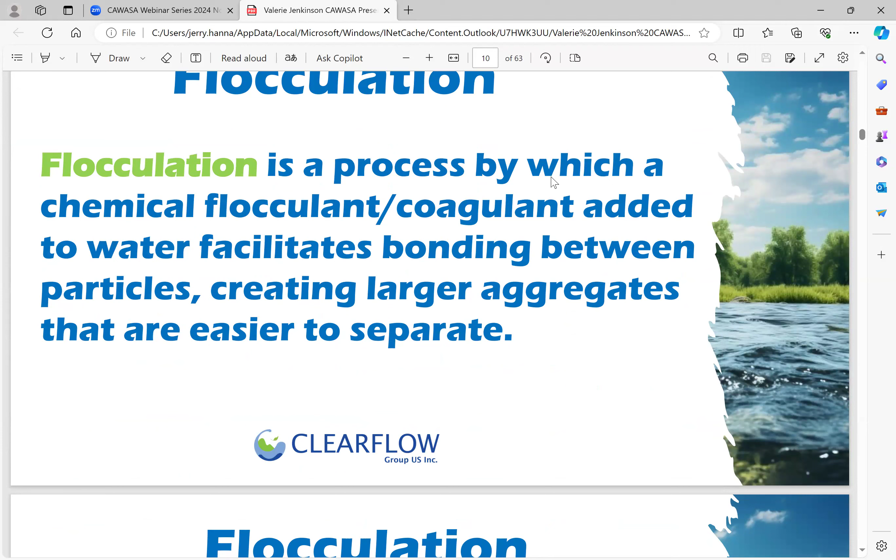Flocculation, of course, is a common process where a chemical flocculant, coagulant added to water facilitates bonding between particles and creates larger aggregates that are easier to separate. Our goal initially wasn't to cause the separation, but to cause the particle to be large enough to capture. The beauty of it was we did it so well, we were able to really clean the water down at the quantum level.

So we're below 1 micron in particle sizes that we're dealing with. We're down in many cases to dissolved particle size, dissolved colloidal particles, etc. So we're now getting into some very unique strata in water treatment.

Jar test demo - I'm not going to do that here today, I don't have the stuff. That was what Hank was going to do as part of this. But basically, it's a very simple process, 10 to 45 seconds. You mix it around and the deposition starts virtually immediately. We're looking at a ratio that we can now coordinate the time factor and optimize the usage.

Industries we serve, of course, include mining, construction, agriculture, water treatment, stormwater, and hospitality environments.

The other thing to consider is that we can act as a pre-treat, a solo treat, or a post-treat, depending on the application. That's a rather unique position to be in, because if we're going in as a pre-treat, we can augment something that's already there. We can use existing processes and infrastructure. If we go in as a solo treatment, we can utilize existing infrastructure wherever possible, really minimizing costs, with a very simple application to add into the process.

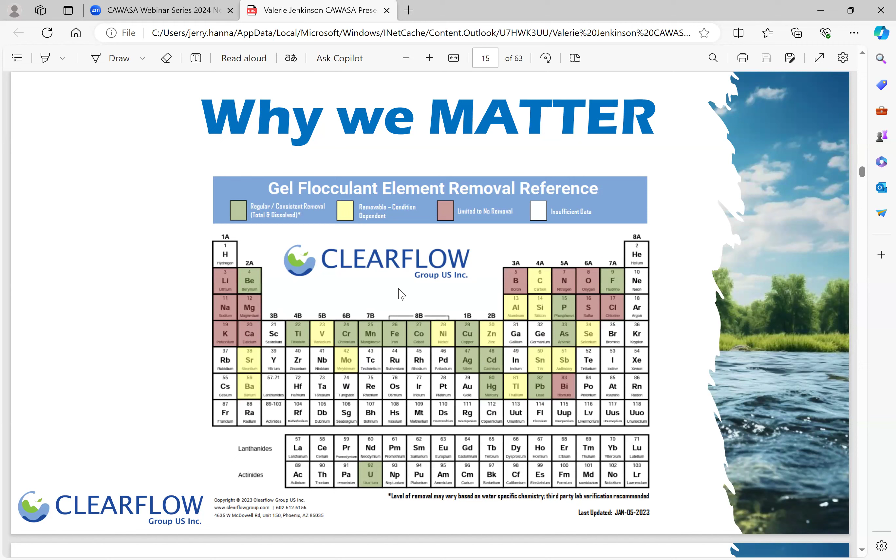But we keep adding more and more to this process as our clients come to us and ask, can you take this out? Recently we had fluorides - can you take out fluorides? The answer was yes, we can, up to 96%. Can you take out phosphorus, dissolved and total? Yes, we can. Because we're the manufacturer and inventor of the products, we typically invent one or two new formulations per year to answer these other water streams and waste streams we're dealing with. A very unique capability, unlike standard flocculation.

Everybody understands the result of a flocculant or a coagulant and what it does, but our chemistry goes far beyond the standard chemistry that's available. We're not just creating a thickened process, then combining it, and then having it fall out. We have a very good process here where we're actually taking care of it without having to worry about things like pH.

In most flocculation processes, pH is a critical part, and they are really limited by the pH in the water. If it's a pH of 3, it's very difficult to treat - they may have to do some crazy balancing to get it, or at a 4 or 5. Or when they're up around 10 or 11, they can't get it out either. So one variation in pH can cause a problem with standard technology. Our technology allows us to work within a range of 3 to 12 without having any variability whatsoever in the efficacy of the product. That's really a unique scenario to be in.

Because we started this in mining, we were dealing a lot with mining and oil sands, et cetera, in Alberta, and we had to deal with temperature variances. For mountain mines, we had a lot of issues with freezing temperatures, and we do a lot of cleaning of water in frozen lake beds, treating the water that's below the ice.

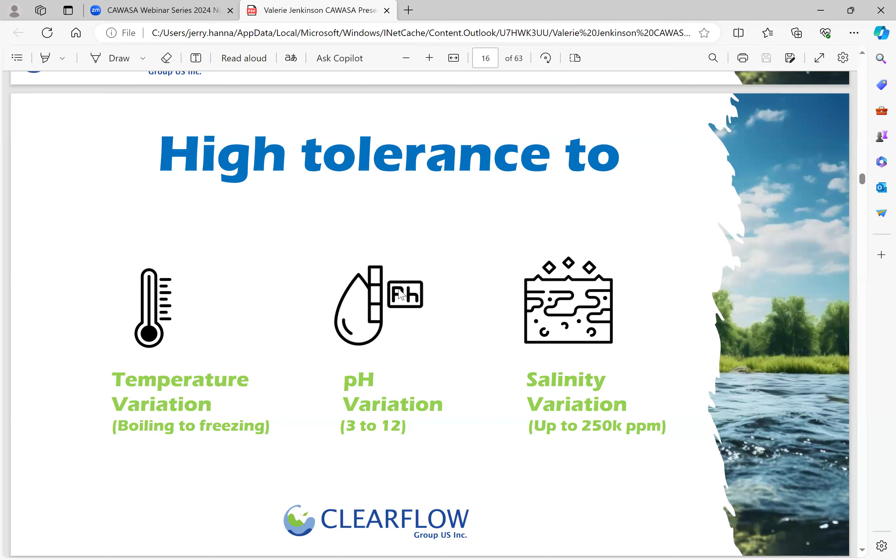We've been over 100,000, one case even up to 250,000 milligrams per liter, parts per million. That's not typical, but we have done it. For the most part, though, freshwater to seawater is a very easy range.

Operational resilience: this material is self-dosing. It does not require dosing pumps. It's a gel flocculant. Now that Hank's on board, I'm hoping he'll do a little demonstration after this to show how the jar test works. We don't require costly sensors, it's self-limiting, we don't need metering, and we're not having a lag time.

As I mentioned earlier, we're dealing with particle size, not necessarily getting to a particular volume in the water. That gives us a unique process for pulling out particles, because they're gathered and bonded through release based on the load factor. So if you have 100 milligrams per liter of TSS versus 1,000 milligrams per liter, it releases the required amount to accommodate that load factor. If the TSS is like 1, it releases way less than it would at 100.

That gives us a unique property as well, and a long release time. The gel flocculant blocks, if in situ and placed in an open channel - we'll see some pictures in a moment - will last anywhere from 8 to 12 weeks, and in some cases as high as 15 to 18 weeks, but standard is about 8 to 12 weeks. In reactor systems, the pipe systems we've developed for mixing, they'll need replenishing every 2 to 4 weeks.

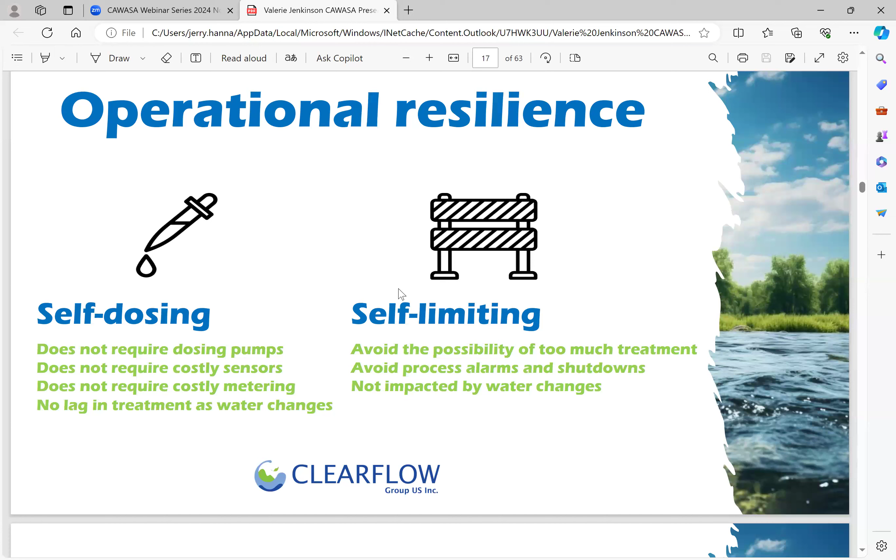Environmentally friendly, we've won numerous awards. In 2022, we won the Sustainable Earth Award. We won 2021's Clean Tech Award, an international competition where they chose 3 companies to be the winners - we were one of the 3. We're very proud of all the awards we've won over the years, probably too many to mention.

Our approach is to utilize site-specific samples and layouts of documents to understand the challenges with our clients. Then we come up with a solution based on our gel flocculant and our ClearFlow technology that will be optimum for the site. We do request water samples so we can determine a specific match of our formulations to the water chemistry and constituents in the water.

And now we get into the wastewater fun. Well, I've been dealing in wastewater since I was 6 years old and fell into a septic tank. I don't think life has ever stopped since then - I've always been around water of some type.

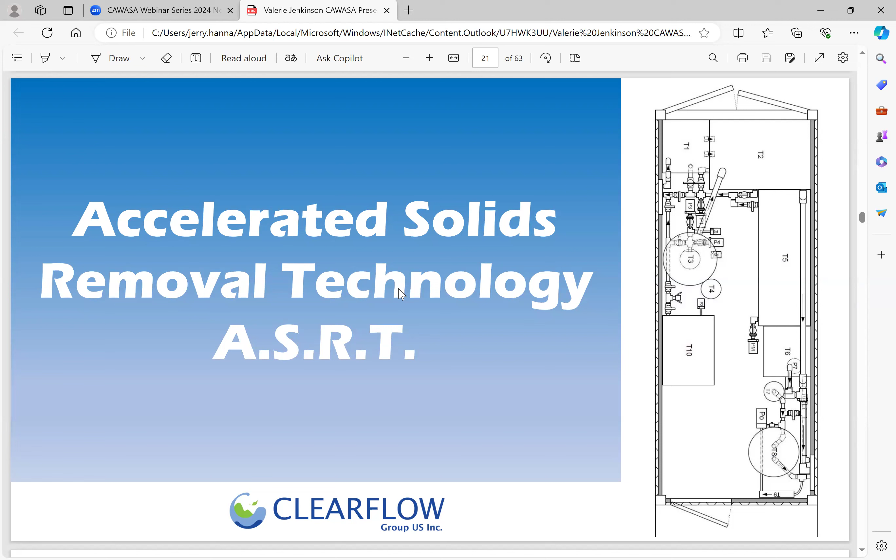We developed a system called Accelerated Solids Removal Technology, or ASRT. The one I'm going to show you here is for 23 cubic meters a day treatment. It's a batch process, but they're scalable, and we've scaled up to larger units. You can put them in series as well, and even do higher volumes. We have a number of them in India, going anywhere from 10 cubic meters per day up to hundreds of cubic meters per day. So it's just a matter of seeing what's there.

Our comparison: centralized wastewater treatment is becoming a big issue, mainly due to infrastructure and the cost of running it to low populated areas. They're large, expensive to build and operate, complex, and require lots of money, people, technology and training to operate. They also have a limited user base. Then you have localized wastewater collection, which goes to a sump system dumped off at a centralized plant - inexpensive, portable, but manually intensive. And then we get down to wastewater deposition areas.

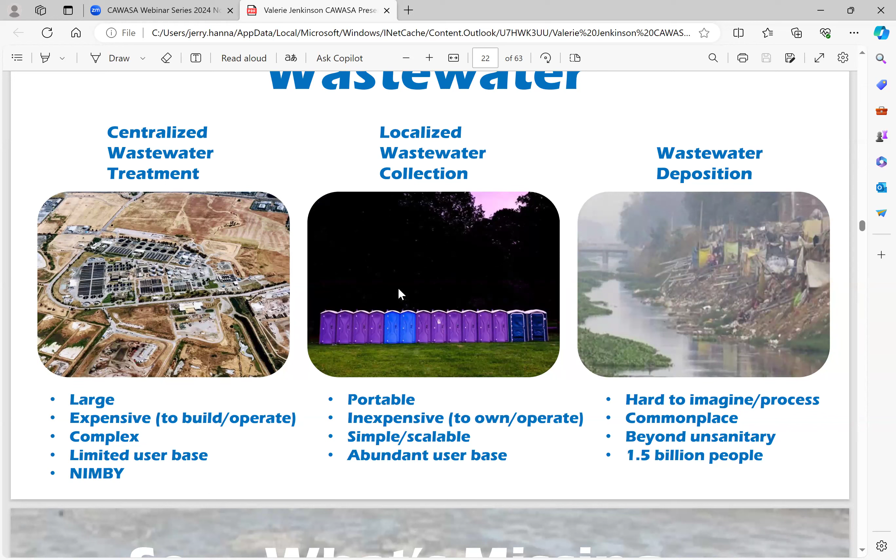This one particular picture is of a river that we worked on in India, where we were treating the wastewater going into it so that we could minimize the impacts. It's pretty scary stuff in some of the sites that I've been to all over the world.

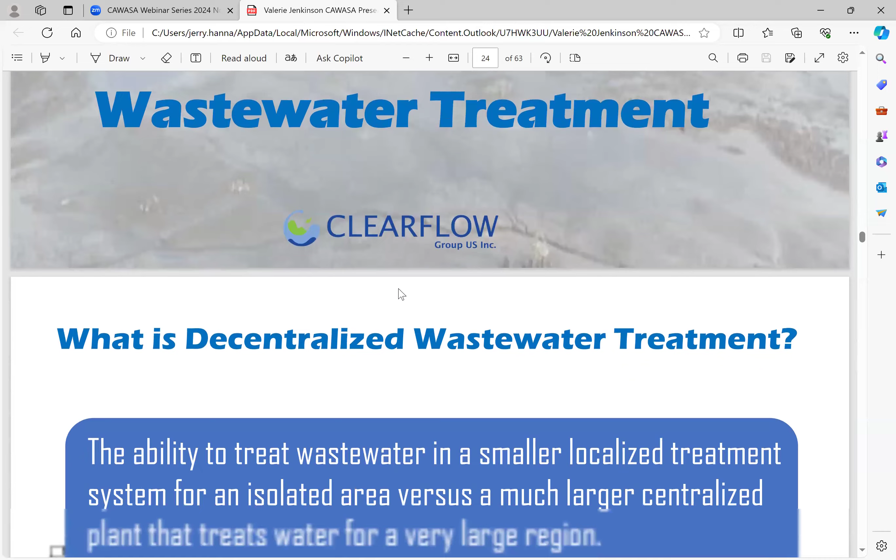What's missing is basically an innovative decentralized wastewater treatment process, which we feel that we've come up with. In my 47 years of dealing in wastewater, this is probably the most efficient system that I've seen. I hate to say that sometimes, because I really sound like I'm blowing my own horn, but it is a reality, and we've been told that by many, many people that use it.

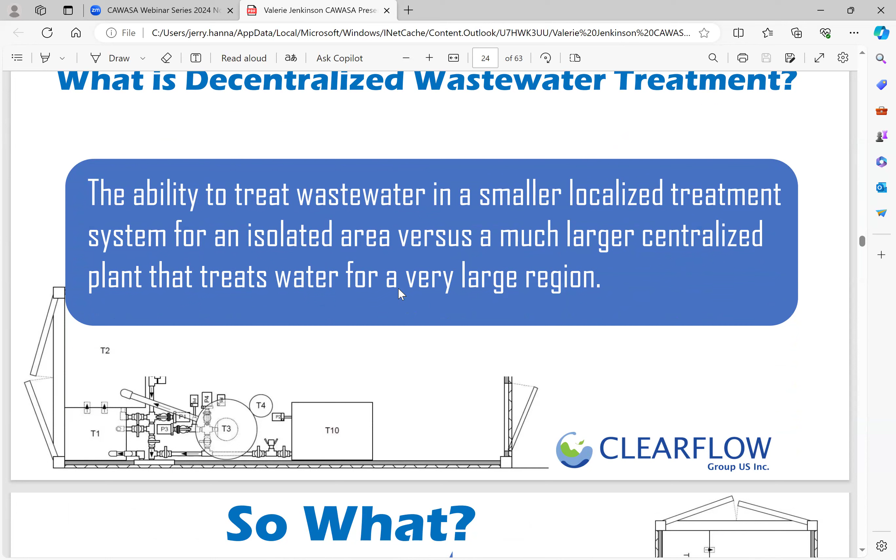From the perspective of operational, it's very simple. You do not need to have multiple engineers operate it, and it can very easily be moved, transported, portable, or made to a fixed system.

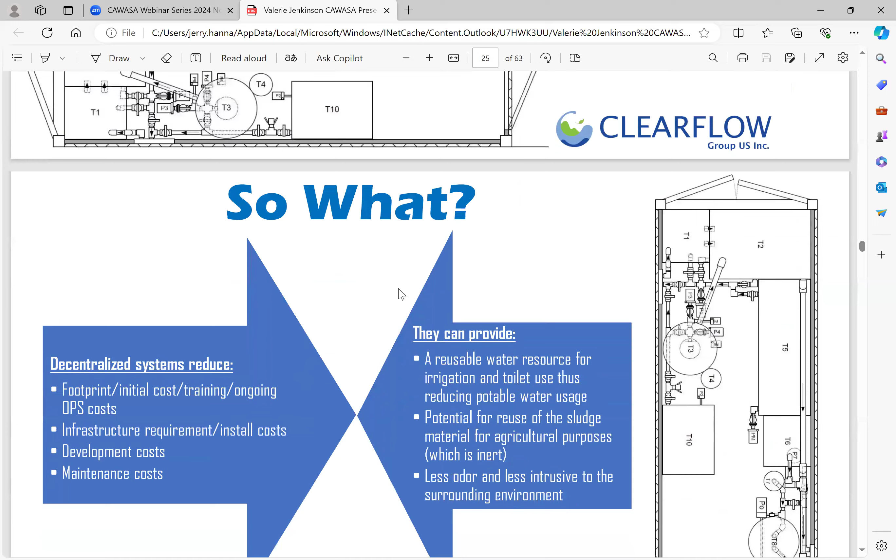So what we do with decentralized systems and our ASRT system is we're basically minimizing footprint, timing and process, initial costs, training, ongoing operational costs, infrastructure requirement, installation and development costs, and maintenance costs.

The core technology in the ASRT, again, is our gel flocculant, and it's very unique property when it actually deals with ozone, because we do have ozone that we've operated in this very low self-producing ozone system.

Typically, to get to an ORP value of about 780, you're looking at about a 20-minute process. When we add the gel flocculant within our system to this process, we're gaining a huge amount of time. In about 4.5 minutes, we're at the ORP value required. So really a huge difference in operational capability and results.

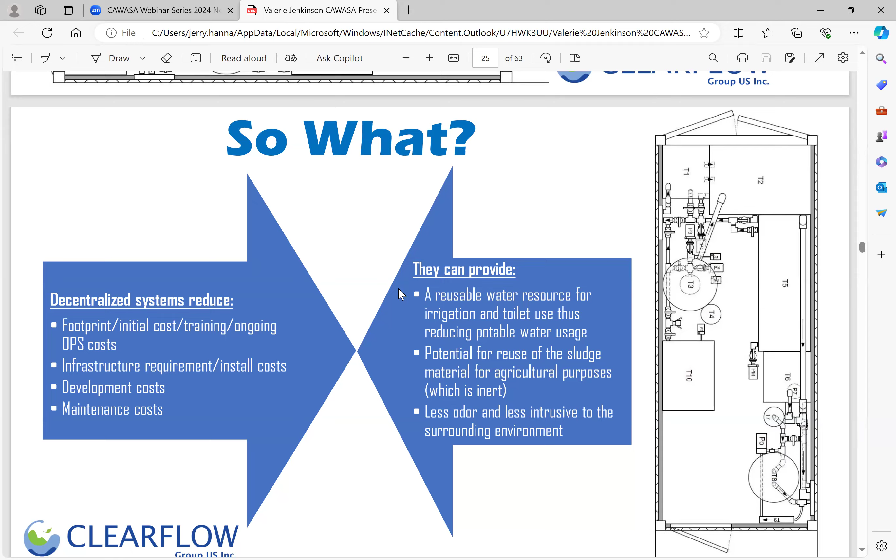So again, we're providing a reusable water source for irrigation and toilet use. We're providing potential for reuse of the sludge material. The sludge that's based in our system, once it's done, that sludge material is basically inert after 24 hours, so it can be reused. It's not going to have the bacterial issues that most sludge materials would have. Again, less odor, less intrusive to the surrounding environment as well.

So it's a physical mechanical process that ClearFlow has developed and patented. It allows for the removal of sediment within minutes, not hours, or days or weeks.

Typically, if you were to put this beside most even decentralized plants that we've dealt with, our operation is within 3 hours, you're seeing clean water. We like to say 24, because then everything has happened, even with the sludge. And it will do about 5 weeks worth of work in that short time period. So it's a huge competitive advantage to have this process.

We constantly are working with the National Research Council of Canada and University of Alberta. I represent as an ambassador for them as well. We're very heavily involved with doing continual research, and I lecture at the university as well, probably about, oh gosh, at least once a month I'm in there helping students and PhDs finish off their graduate studies, etc.

It's very good where we're looking at all of the constituents within the water, TSS, TDS, BOD, removing it from the water down to the levels that need to be hit, and for reuse as well. So we're really looking at that, having an advantage of very clean water for repurposing.

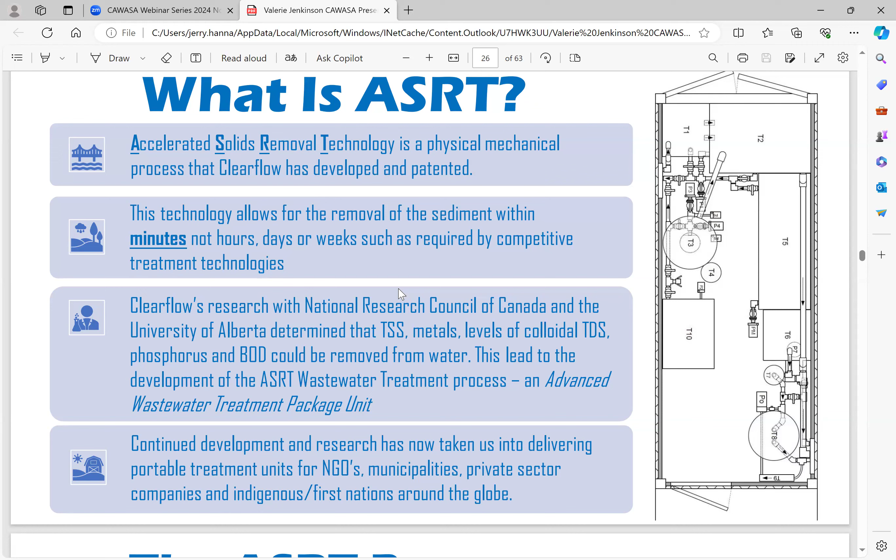In much of the wastewater streams that we're dealing with in some of these countries, they do a lot of mining or are in close proximity to all their waste streams. We're having to take out some very nasty metals as well. So this process does it all in one. You're not having to add a secondary process.

It's fully modular. It's portable. It can be trailered. It's enclosed for safety and security. It's plug and play. We've made everything so it's field ready and field maintenance capable.

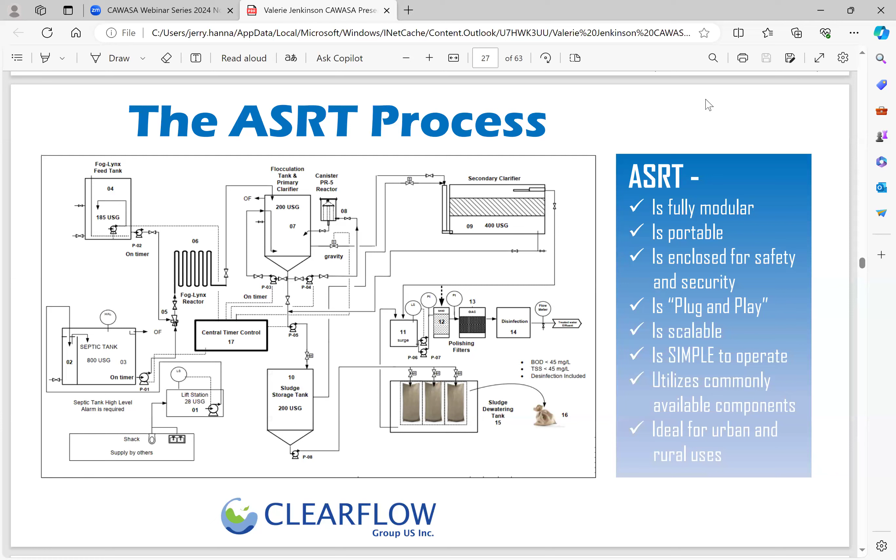So it's a matter of just changing out a pump. You just unplug one pump, put the pump back in. We've made it very, very simple for the operational piece. We're all about the operations and making sure that it works for those in the field. It's scalable, it's simple to operate, utilizes commonly available components, localized, and ideal for urban and rural uses.

So stage one in the process for the ASRT is multiple source influent water consolidation, loading surge tanks for volume control, utilizing macerator pumps to achieve particle size uniformity, and also looking at going into stage two.

We have the influent water treated with gel flocculant and what we call FOG lynx, which is a way that we're actually destroying the fat, oil, and greases and breaking them down, which most systems do not do. They get a buildup of fat, oil, and grease, and they cause a lot of clogging. Whereas ours actually breaks the fat, oil, and greases down and makes it simple to incorporate into the process and releasing of the water. Stage three, sludge is transferred into the sludge tank.

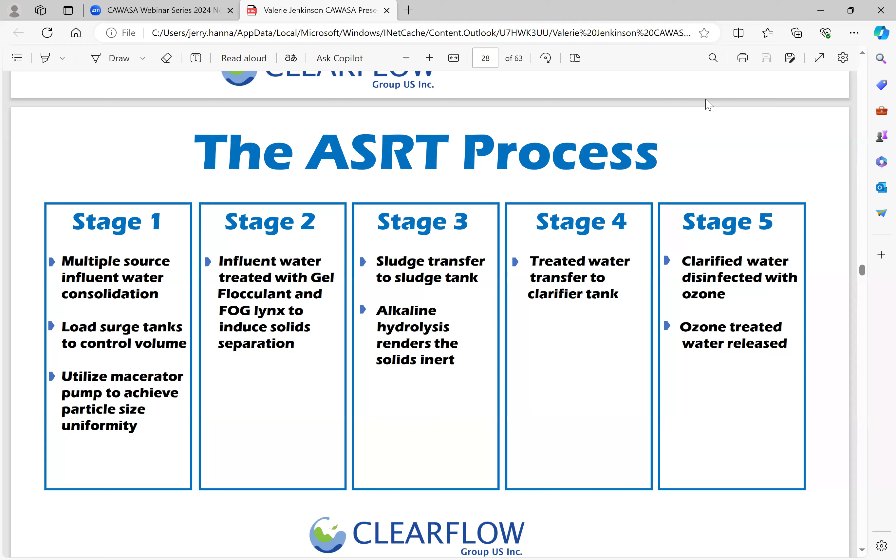And then we have a kind of an alkaline hydrolysis process that renders the solids inert, as I talked about earlier. Stage four is the treated water transferred to the clarifier tank, and then stage five, of course, clarified water is disinfected and can be treated and released.

So the process on a 150 gallon batch system is about a 20-minute batch cycle time. So real simple and easy.

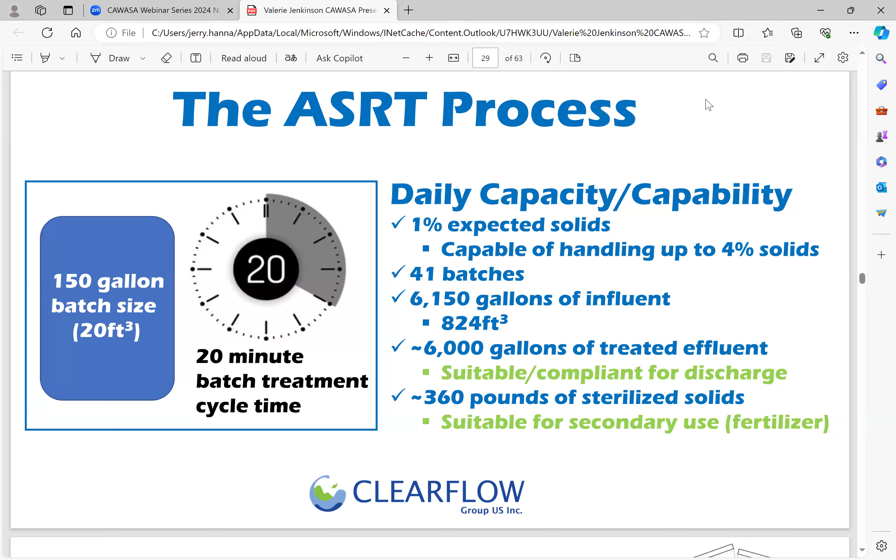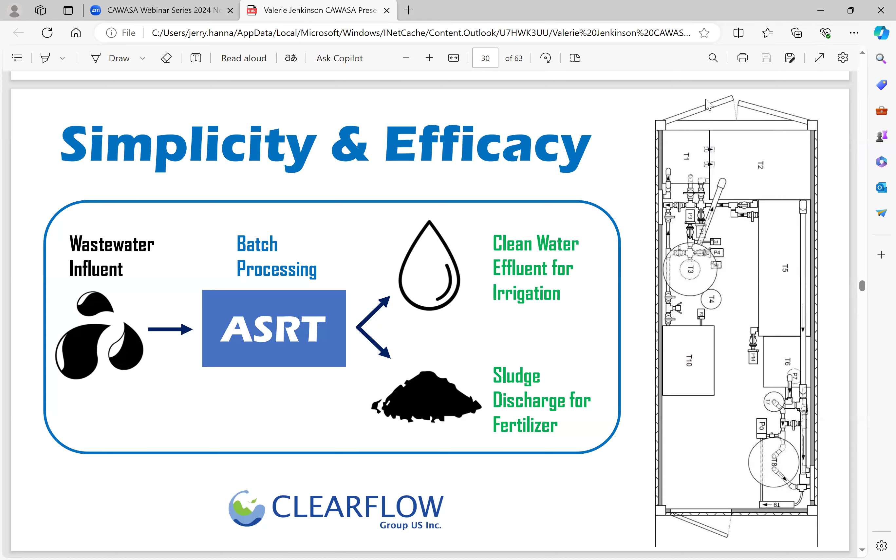Basically capability, 1% expected solids of solid ratio, capable of handling up to 4%, 41 batches or 6,150 gallons of influent, 6,000 gallons of treated effluent is suitable, compliant for discharge. And we have about 360 pounds of sterilized solids available for secondary use. So really a simplicity and efficiency process, really high efficacy, and giving a lot of result in reusable materials.

Results, this actually, if I look correctly, yes. So this is actually some results that we had done by a lab in India. And the reason that we put this here, if you look down near the bottom, they had a lot of metals. So they had iron, they had nickel, but they also had chromium, which was really, really a nasty factor.

And so we actually were able to take all of those metals out and bring them down to non-detect. We also took the TSS down to virtually a non-detect factor. The pH, we just had to do a slight balance on the pH. And then the total dissolved solids, of course, reduced dramatically by about 8 times.

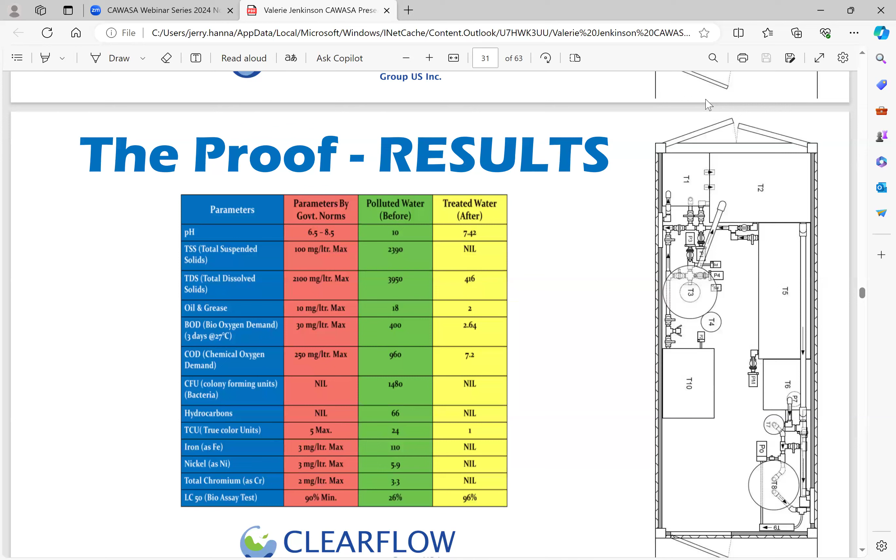This particular unit, as I said, that when we were talking about, was the 23 cubic meter per day system, and really simple 20-foot C-can or containerized model. Setup time's about 8 hours and getting everything operational with the lift stations. Technical support is available.

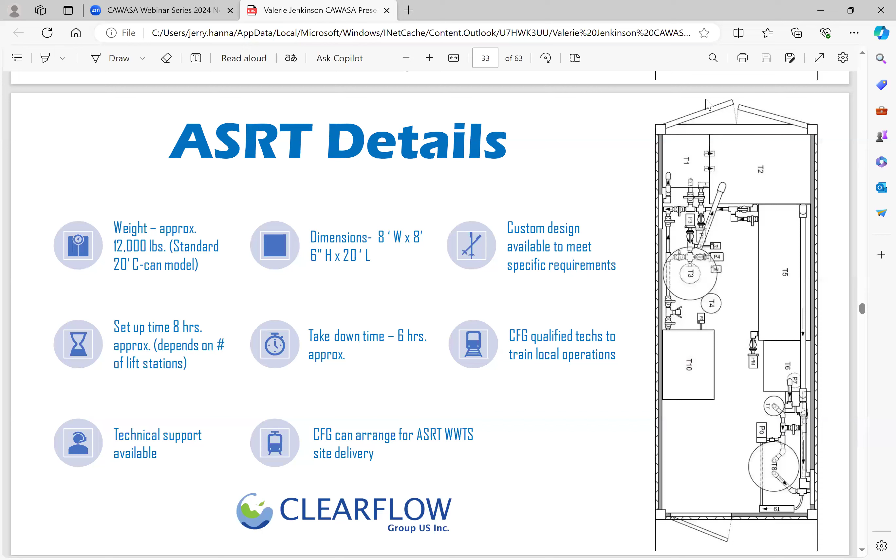Dimensions, say 8 feet by 8 feet by 20 feet long. Takedown time 6 hours approximately. We can arrange for site deliveries, etc., and it can be available to meet specific requirements. If you have some industrial waters that you have to deal with, we'll run some extra testing in our labs and make sure that we get the right formulation for that particular application.

So again, going into the repurposing and water restoration, we talk about different flocculant types that are currently available and have been available for many years through granular and liquids, and then now, of course, our addition of our gel flocculant.

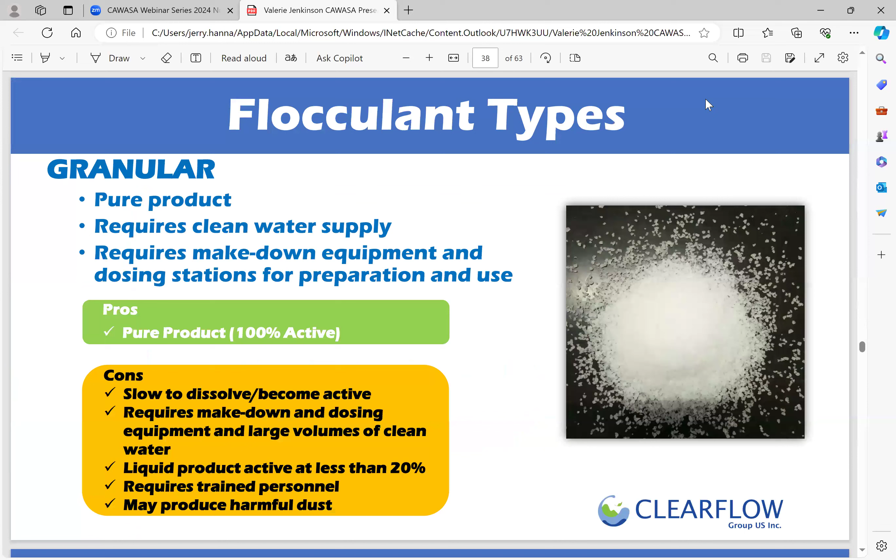Granular is a pure product. It requires clean water supply, make down equipment, dosing stations, highly trained personnel, and a very high ratio of monitoring to ensure that you've got no negative effects on the environment.

It's 100% active. You've got cationic and anionic, depending on which the application is that we'd be using. In many cases, we see anionics being used less than cationics, although that's starting to change a little bit.

The cationics have very, very negative effects on aquatic life. They're slow to dissolve to become active. Typically, you're looking at a 90 to 120 minute make down to convert it into a liquid before you dose it. Most people do not wait that long and end up dosing out live product. And in those cases, we typically have a lot of animal kills or fish kills.

Requires make down and dosing equipment, large volumes of clean water to make it down, because typically you're running at about 0.5% to 2%. No more than a 20% mixture, but typically 0.5% to 2% is your operational ratio. So you're looking at well over 90% is water.

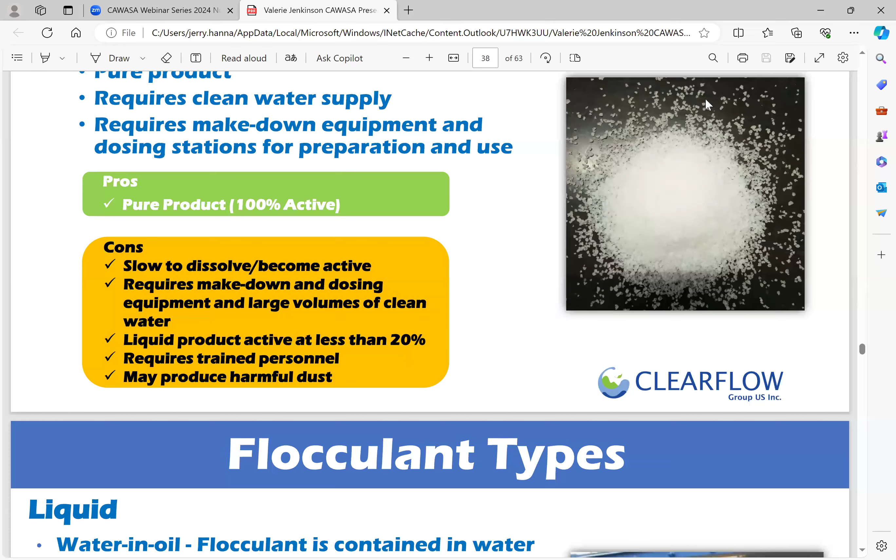So the liquid product is active less than 20%, as I just mentioned, and requires a lot of people to operate, and can be having inhalation issues for humans as well from the dust that comes off the granulars.

Liquid, again, there's two types. There's the emulsions, which is the water-in-oil that's already pre-mixed in a specific blend. You're still looking at about 70% of that being water and oil mixtures. Approximately 30% is active product and requires addition of a coagulant.

Typically, when you're looking at the application, the equipment alone, I know in North America, the equipment is about $200,000 to $500,000 per unit. So when you have multiple site units on a large location, it can become quite costly. That's one of the biggest things, high cost to ship since it's mostly water in the product.

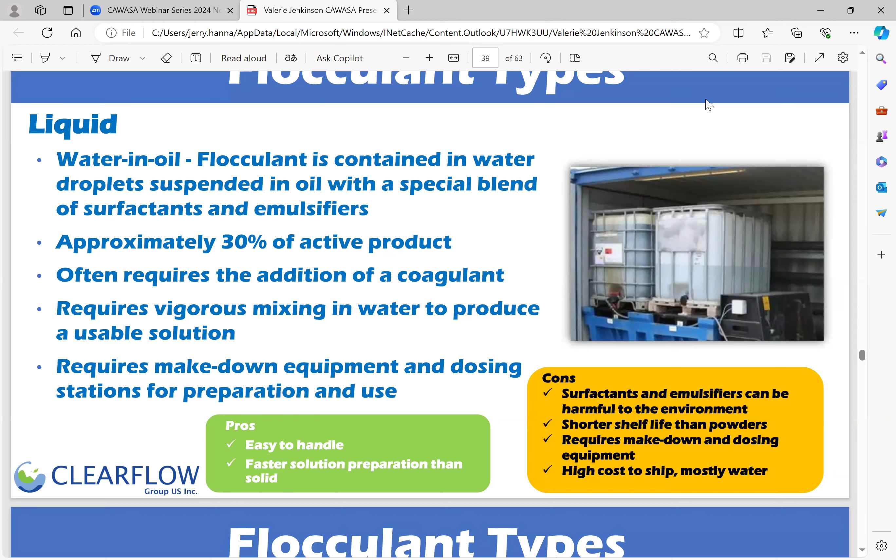They require make down and dosing, and again, shorter shelf life than the powders. Emulsifiers and surfactants are almost always toxic to aquatic life, so not great. They are easier to handle than a granular because this is already pre-made and ready to dose. So it does have a couple of pros, but the cons typically outweigh that.

Again, dosing stations, as we talked about, involve very high capex and operational costs. The energy required to operate them and maintain operation gives them a higher carbon footprint and greenhouse gas emissions. Dosing pumps are expensive and very

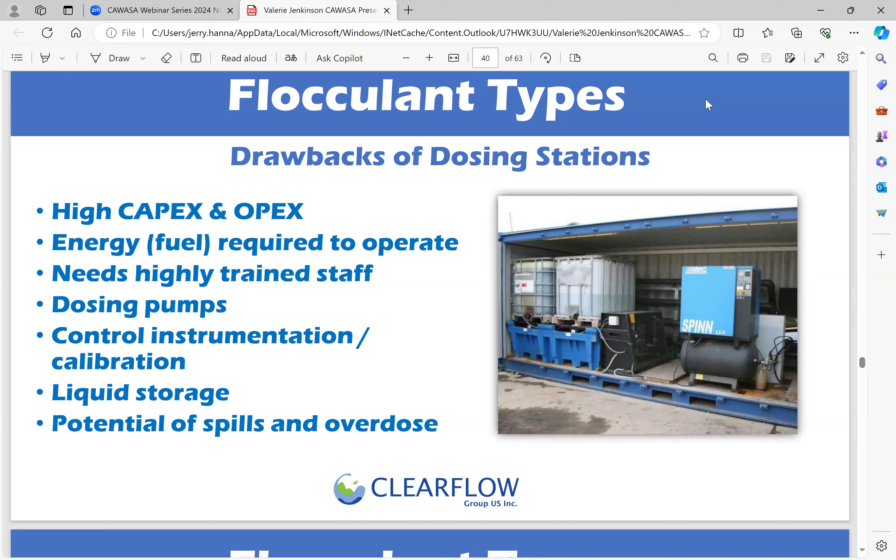finicky to deal with. They don't necessarily always run the way that they should. Control and instrumentation calibration, and a huge amount of lag time, because typically you're doing a measurement off of your water quality that then gets transmitted through the sensor back to the panel. The panel then starts adjusting the dosing. So there's a big lag time in there, and that becomes quite a problem, and a very high potential for spill and overdose.

So this is our gel flocculant. As you can see, it's a block or slab format, about the size of a loaf of bread, about 3 inches high, 9 inches long, 5 inches wide. They have a high tolerance for pH, as we talked about earlier, from 3 to 12, a broad temperature range from freezing to boiling, and high salinity tolerance for both freshwater and seawater.

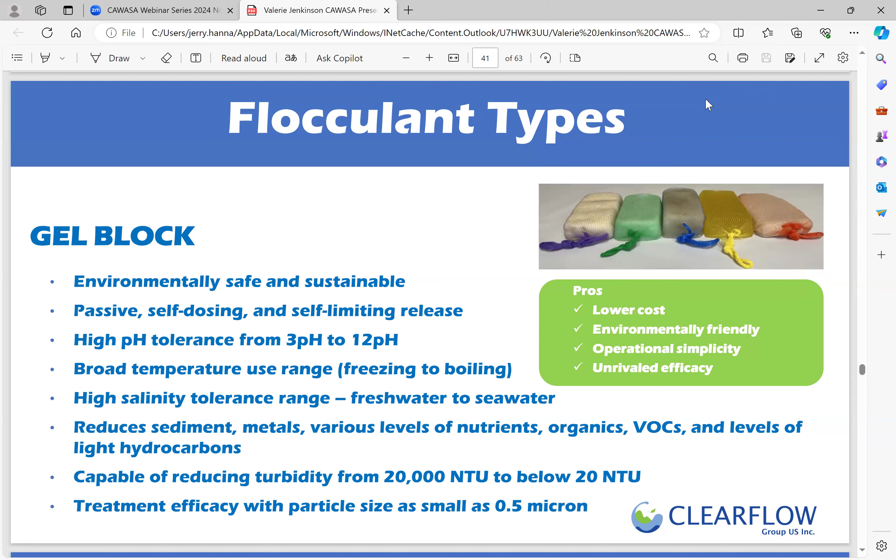They reduce sediments, metals, various nutrients, organics, VOCs, and levels of light hydrocarbons, and are capable of reducing turbidity. We say typically about 2% solids would be the high end - we have gone higher, as high as 4%, but typically we're working in a ratio of less than 2% solids, or up to 20,000 NTU. And we're getting particle sizes that are nanoparticles, down well below 1 micron in many, most cases.

They just need, for operational efficacy, compromised water, and they need to have flow energy. So the process of release - instead of having a pump that doses it, it's the amount of flow that goes over them, and mainly the particle load. The higher the particle load, the more it's going to release. The less particle load, the less it's going to release. It needs that turbulent energy to be able to cause the particle collision so that the particles will actually bind together and fall out.

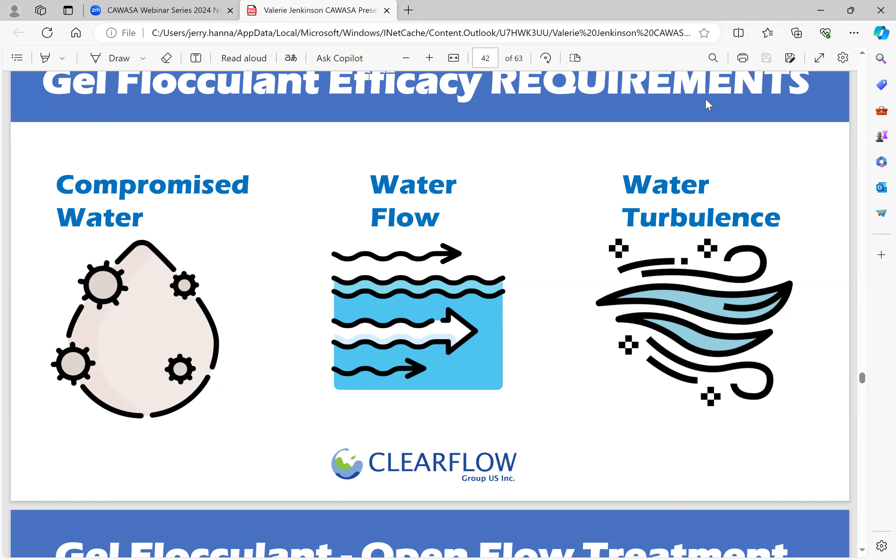So very simple process - flow energy is virtually what does the job, which eliminates tons of equipment. You don't have to have the dosing equipment, the monitoring equipment, you don't have to have the big floc stations, and you're saving hundreds of thousands of dollars in OpEx and CapEx.

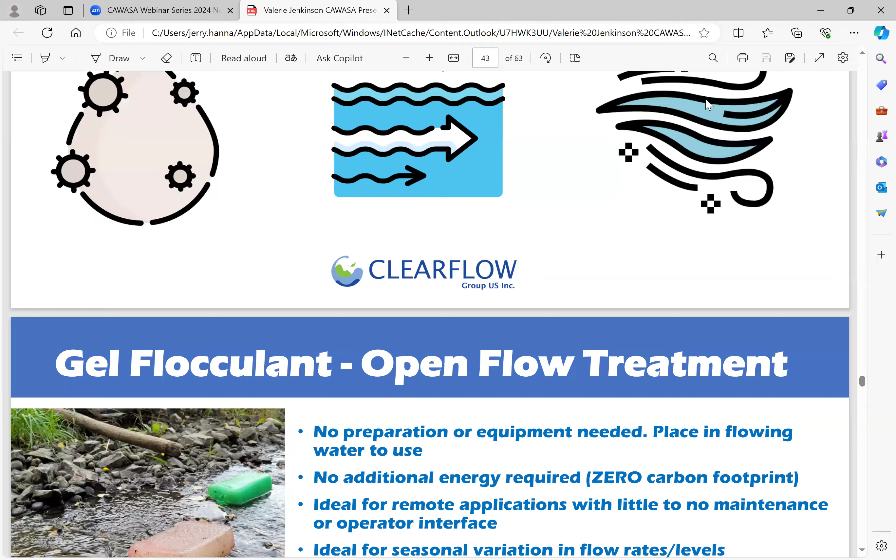We manufacture them under high quality standards - it's our own manufacturing process, right in our plants in the US and in Canada. We have different formulations that can be used independently or in combination.

Their consumption rate is visibly discernible, so as I said, it's going to be based on the particle load. They do hydrate and they'll swell, and then when they get to the point of swelling, they're actually releasing - so they've been activated, they're releasing. Say the water goes away and they're bone dry, and you have no water for 6 months or a year.

Water comes back a year later, reactivates them, and they're operational again. So again, a very unique feature: zero carbon footprint, you're not using any energy. You just have to have them placed in the right spot. They're totally safe for the environment, fish, aquatic organisms, mammals, etc.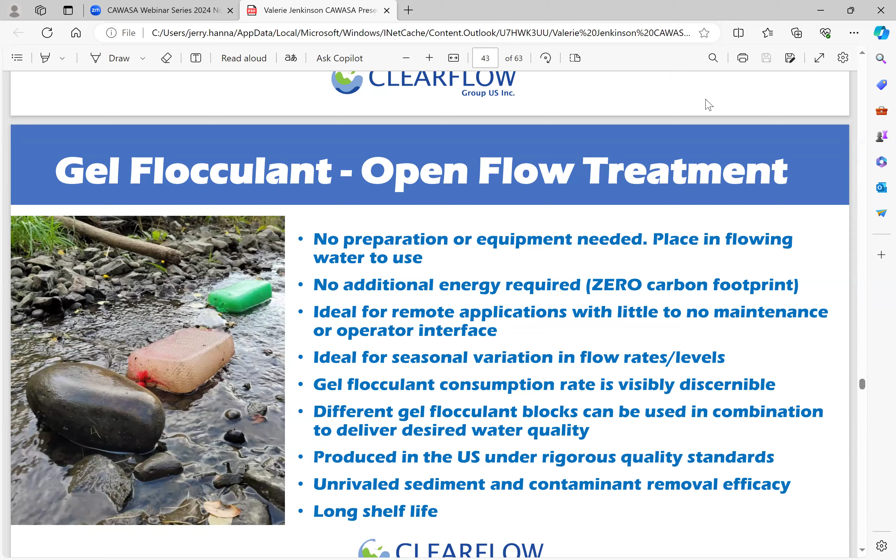And a very long shelf life. We say 5 years, but I have products in my warehouses that are over 10, 12, 15 years old that would still activate. That's an open flow treatment again.

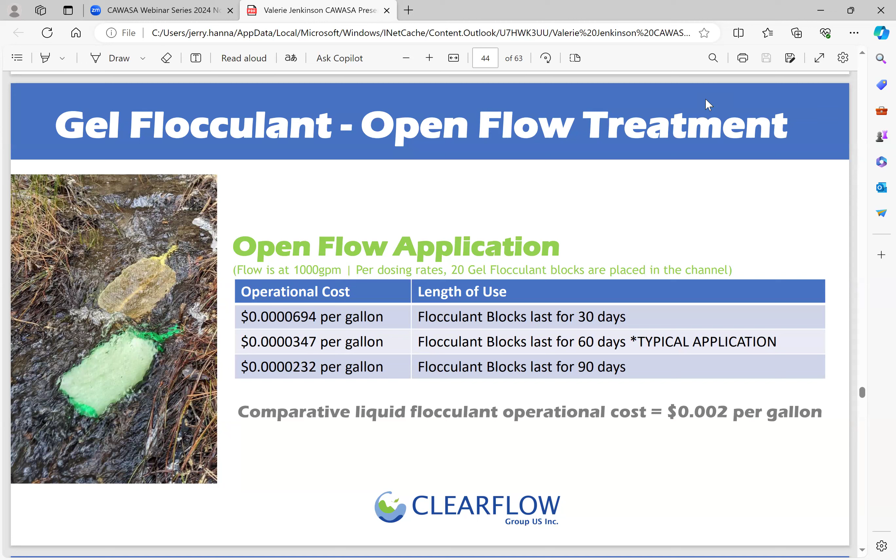Operational costs are way below $1. As you can see, per gallon cost is portions of a penny per gallon. We're saying 30 days, 60 days, up to 90 days application, so that's why we put the pricing range on there for those various operational timelines. If you look at a comparison to liquid flocculants, obviously we're considerably cheaper and much easier to operate. That comparison doesn't really account for the cost of buying the equipment, so we're way, way cheaper.

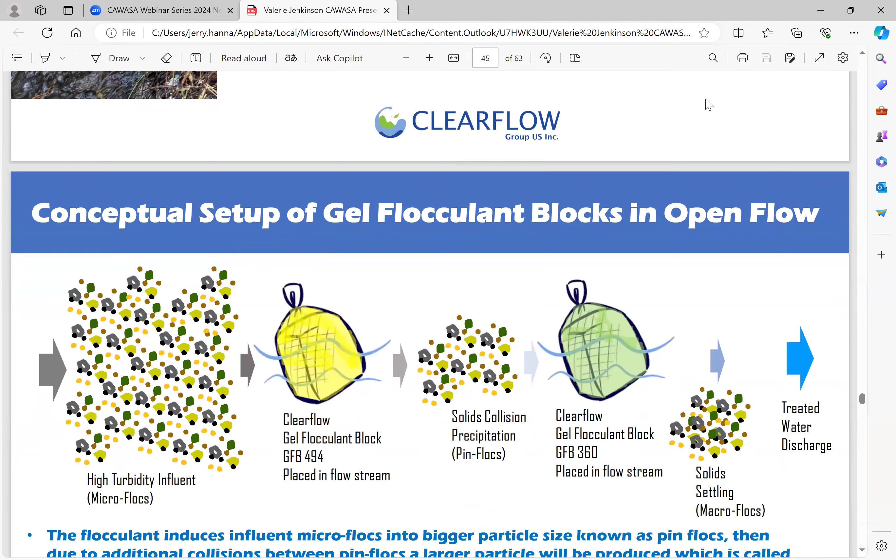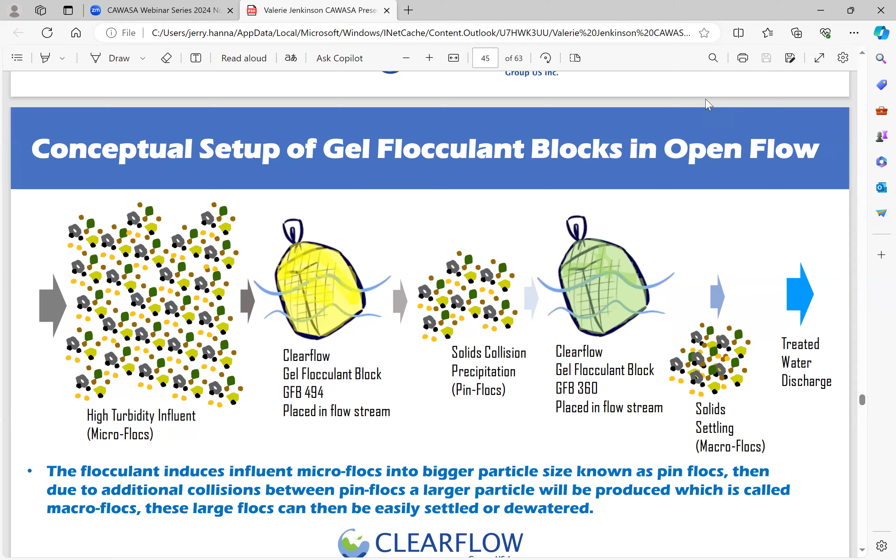Conceptual setup of an open flow system: high turbidity influent, put our gel blocks in place based on the flow value. We have a calculation, so many blocks per volume of flow. They have a mixing time, which creates the collision and precipitation of the flocks. Then we have a gel flocculant 300 series, which causes the flocks to bind tighter and heavier. Then we have the settling or capture point, so the released water is treated for discharge.

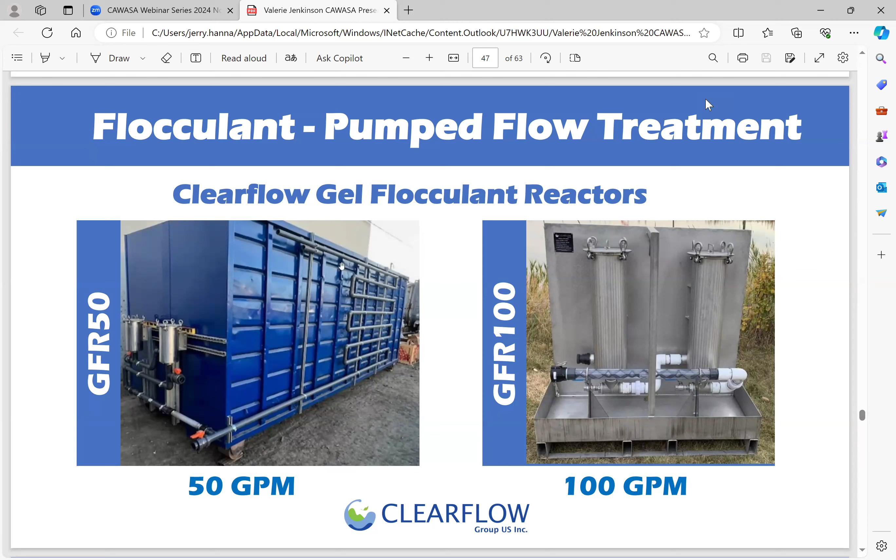So there's a 50 gallon per minute system, 100 gallon per minute system. Here's one in play: a 1,000 gallon per minute system and a 300 gallon per minute system. We've now just introduced a new version of the 300, which is almost identical to the 1,000 gallon a minute system, just a smaller version. As you can see, the only thing we need there is the pump. There's no moving parts, and there's just cartridges that get replaced on a periodic basis based on usage.

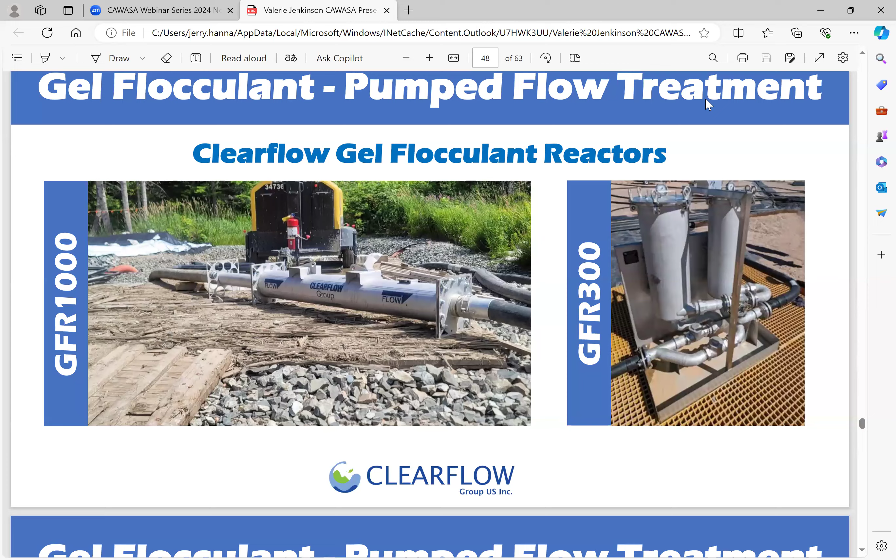This particular site is 5,000 gallons a minute, pumping into 5 different reactors off of a manifold with an 8-inch inflow line and a 6-inch line going into the individual reactors. This is a very large mine site. They now have 26 of these reactors at this particular site, and they're pumping all over the place to clean their water. We're actually moving a lake so that they can drill a mine shaft.

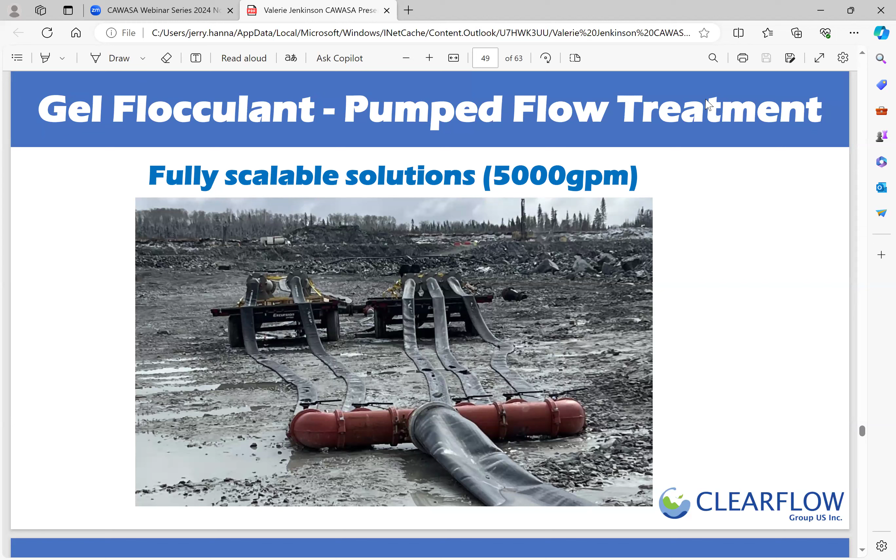So that's rather unique. Here's how simple the reactors work, and this will work for various ponds that have lagoons that are wastewater based as well. So it can take a lot of that material out and make it higher quality than what it is, and then it could act as a pre-treat for your systems that you already have in place. As I said, we can be a pre-treat, a sole treat, or a post-treat. In a lot of cases, we can do even post-treat for your wastewater plants. If you're having a little high turbidity, we can do that final polish before we go.

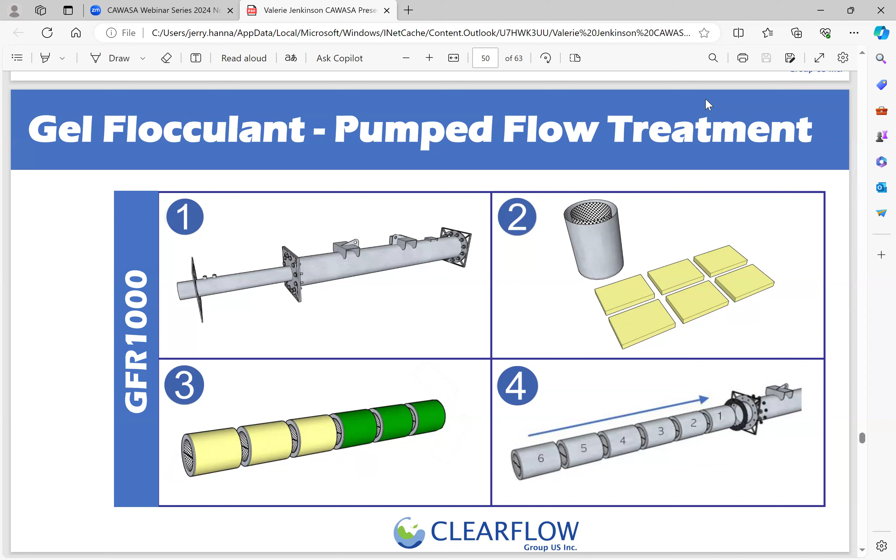Here's a reactor, the primary stage in number 1. On the left-hand side of the unit is a 6-inch or 150 millimeter pipe that's got basically a flighting inside of it, creates a vortex energy that goes into the larger system, where picture number 2 is the cartridges. Each individual cartridge holds a certain amount of the gel flocculant slab inside of it. Then each of those cartridges gets put inside the larger body of the reactor system, the mixing system, and there's 6 of them in there. This would be changed out every 2 to 4 weeks standard, and it has the right formulation as we deem based on the water testing we've done for your site. This will treat up to 1,000 gallons per minute.

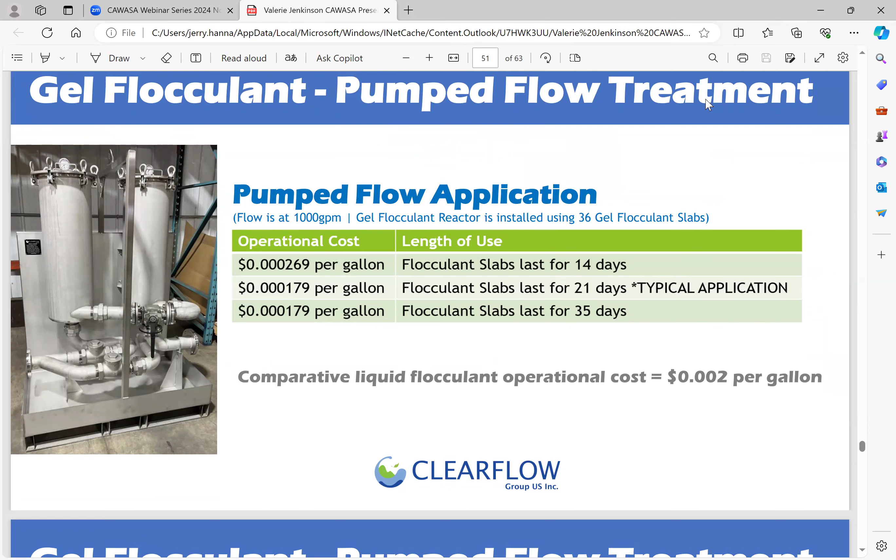Again, the cost we've got is just astronomically cheap compared to what's out there, and the OPEX is very, very minimal. If any, just check your units every once in a while, make sure that they're still operational and having the water go through, and then replace the cartridges as required.

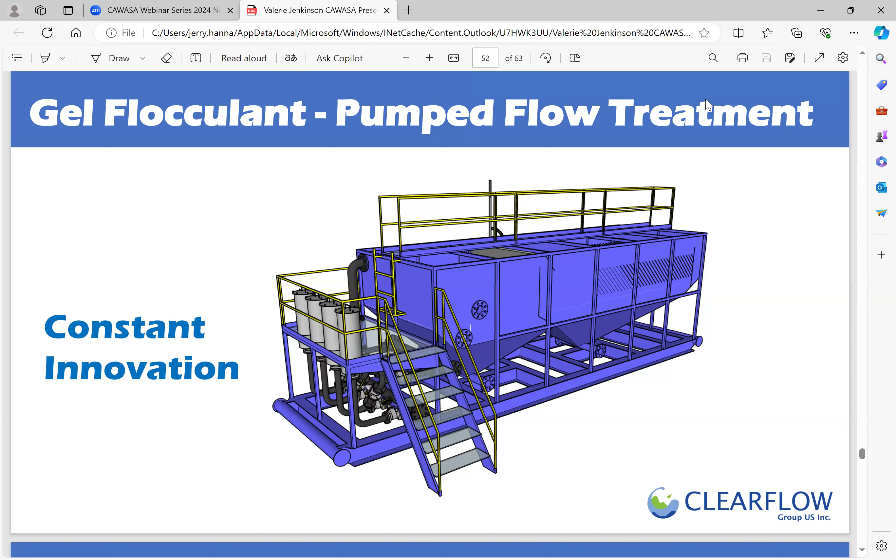Here's a larger version of this. It actually captures the solids as well. Instead of having a deposition point, we have some sites where they cannot capture the solids. So this would be the plant. The water goes into the vertical stacks, which has the gel flocculant in it on the left-hand side, then goes to a specific treatment for clarification, capturing all of the solids, and then the final water is released for final polish, or just released to the environment.

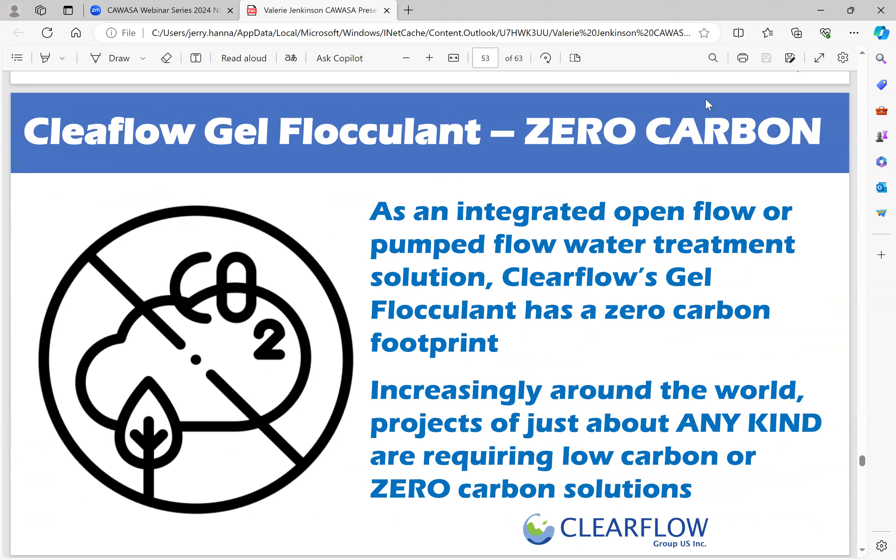So it's a zero carbon integrated flow process, zero carbon footprint. And again, we're going worldwide with this.

So a little quick touch on stormwater. A lot of stormwater situations are being amplified by wastewater inflow to them, flooding especially how that happens. So with the flooding, you're getting a lot of fecal matter and other organic materials in there, and sewage overflows are getting into stormwater as well. So it's quite important that we maintain the quality of our stormwater for repurposing and reuse as well.

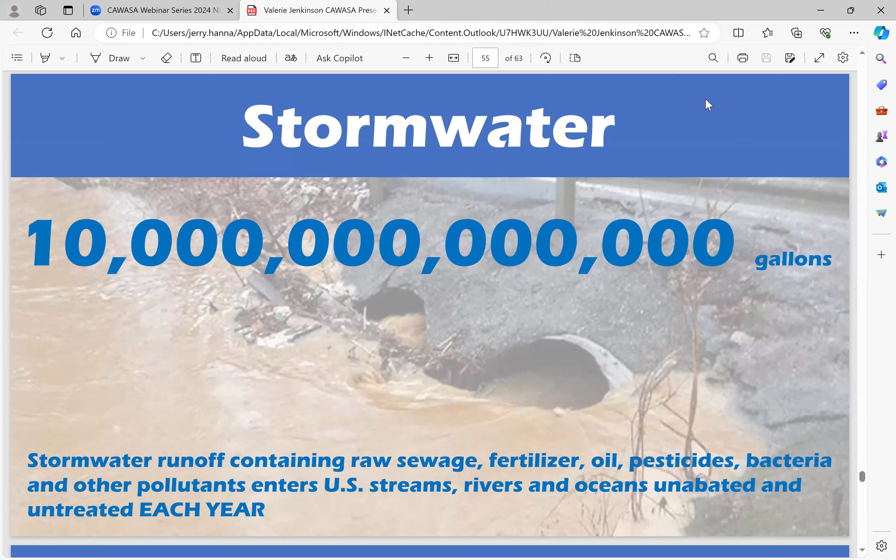Again, the hardest state in the US to get approvals for is actually Washington State in the Western US. And they have very stringent guidelines because of their proximity to the ocean and how much they deal with the ocean.

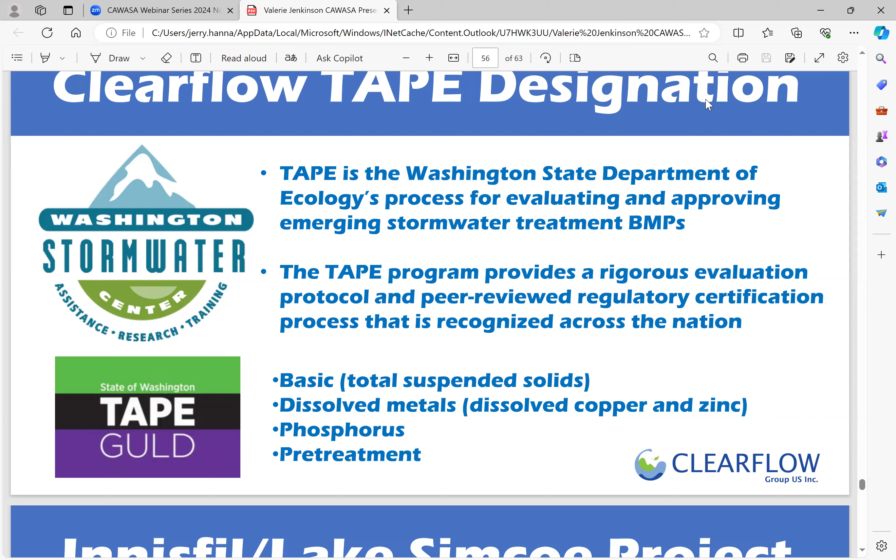All of their studies, we are approved for use in Washington, but on their studies we were given approval in 3 weeks versus the 2 years that it normally takes or more, because they based all of their criteria on our technology for other companies to come up and get their approvals. So they have to meet the criteria that we meet, and we gave them all of the initial data. So their criteria is based on the ClearFlow product. This is very proud to have that as an approval, and the fact that we helped them change their process.

This is a big infrastructure process that was being built and added to for a subdivision. They're adding quite a few hundred homes. And the federal government, Federation of Canadian Municipalities, got involved.

The federal government of Canada asked us to prove that we could take out phosphorus, because they were having really high phosphorus loads coming in and getting into one of their major lakes from all of these subdivisions and their stormwater. As you can see, the average phosphorus removal was anywhere from 80% at the lowest point to as high as 98%. The averages were well in the 90 percentile in removal of phosphorus in the dissolved factors as well. We increased their efficiency.

Normally you can get 20 micron particles or 40 micron particles with the storm pond design. We were getting over 80% of 20 micron particles and more out of the water, which they've never seen before. So we increased the efficiency of their storm ponds by 74%.

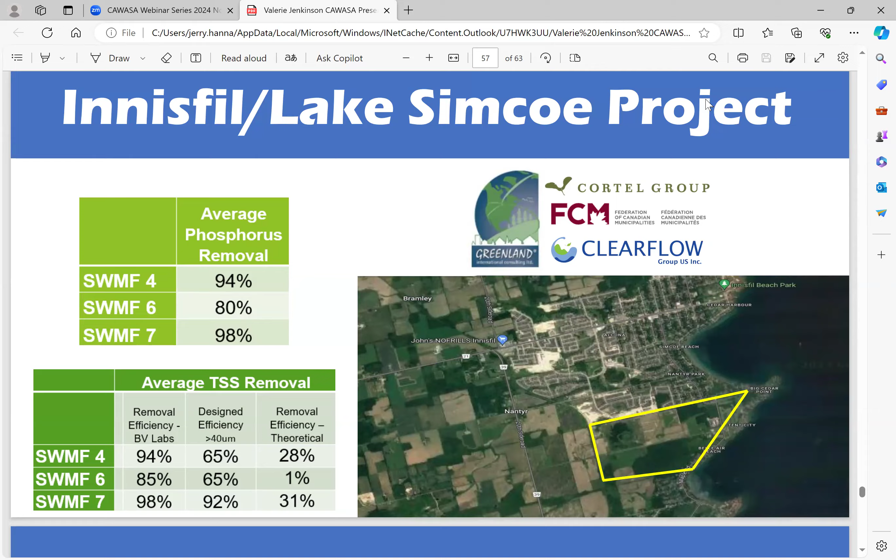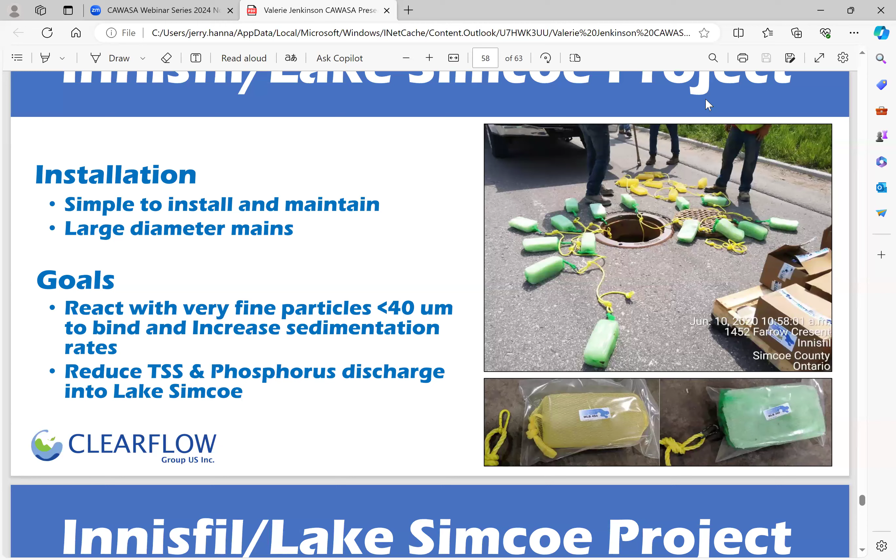Very simply put, we used existing infrastructure. We put our blocks down into their storm system and it reacted with the particles. Then when it came out into their storm ponds, it dropped all that material. We did some natural fiber material that we provide, treated with our product, as a final polish in the ditches, and the water went clean into the next level of environment.

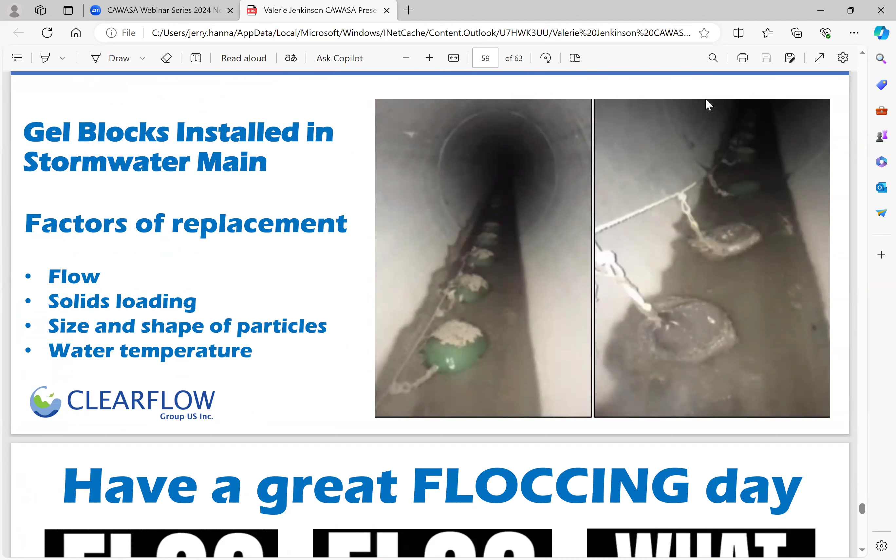So very simple. Here's pictures of it in situ, in the storm pipes. Nice, simple, easy to operate with. Doesn't cause any blockages. And we're just hoping everybody's having a great day.

And pardon some of the connotations here, but just a little bit of a laugh at the end here. So we're globally proven, we're starting to globalize our company now. Hopefully this has been great information for you. We'll just open it to any questions you might have. Thank you.